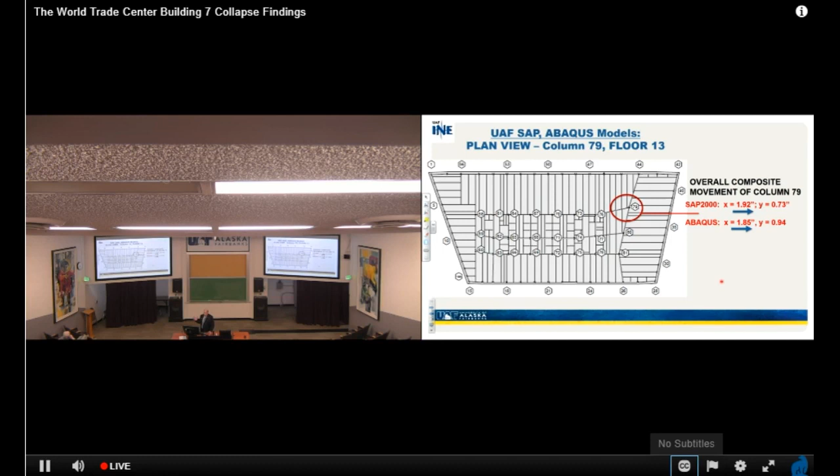And this is on floor 13. Are we all okay? Feeling good about it? All right, good. So approach one, NIST—wait a minute, I'm sorry.

So the other thing I want to share with you is the movement of girder A2001 relative to column 79, floor 13, was as follows. We looked at composite, partially composite, non-composite, and NIST only looked at one thing: that was 5.5 inches to the left, non-compositely. NIST later revised their girder movement to 6.25 inches after being alerted that the bearing seat was 12 inches wide and not 11, as originally stated.

And NIST also only examined the non-composite condition, which wasn't the case on that day. It was truly composite.

Approach two. We took ABAQUS, a very, very sophisticated finite element program, which if it doesn't have the algorithms you need, you can add them to it. It's really quite powerful, really a wonderful program. We used it to simulate, using solid elements, the floor framing for floor 13. That's where all the buzz is about, floor 13.

These elements were used to evaluate the validity of NIST's collapse initiation hypothesis. The NIST assumptions were that the exterior east wall was fixed, and that was not valid—it was flexible. I think I've already told you this more than once.

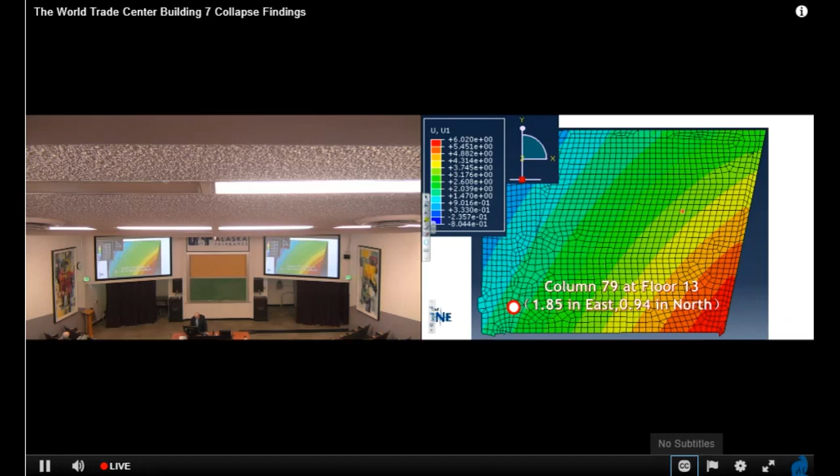Evaluation of the NIST hypotheses is what we're going to talk about next. Here is column 79, column 80, 81, column 44. Here's a group of beams with horizontal stiffeners between them so they wouldn't buckle. And here's the other beams, B3004A, and so forth. The reason that's important is we're going to take a computer model and virtually simulate that, then use the NIST assumptions to see if they were actually correct.

I didn't want to just say, okay, I'm not going to accept it. We needed to be sure whether it could have been correct or not. So taking that, NIST argues that the absence of girder shear studs caused the girder to not have sufficient lateral restraint. Failure of the girder-to-column connections were caused primarily by thermal expansion of large span lengths of the northeast floor beams. This is their argument—these are not my arguments, please understand that. You see the big letters, NIST? Okay, that's not mine.

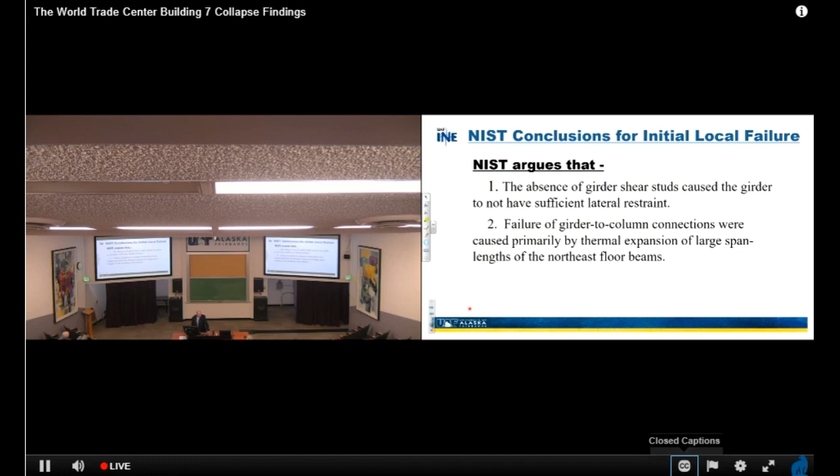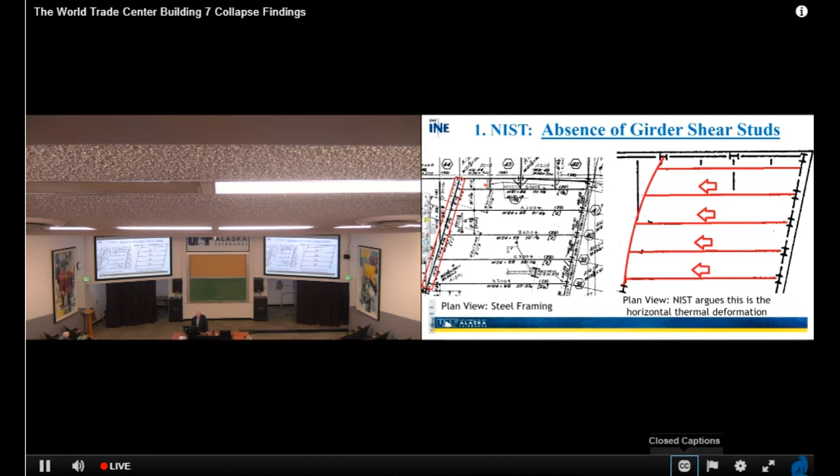Absence of girder shear studs—if they're absent and it's heating up and moving from that exterior wall that they claim was fixed, then it's going to go west, okay? This is plan view, and this is the girder A2001 from the actual drawings. This is just another counter-argument to the girder missing shear studs claim. It was found that court records show there were 30 shear studs equally spaced along that girder. So the solutions based on no shear studs were not valid.

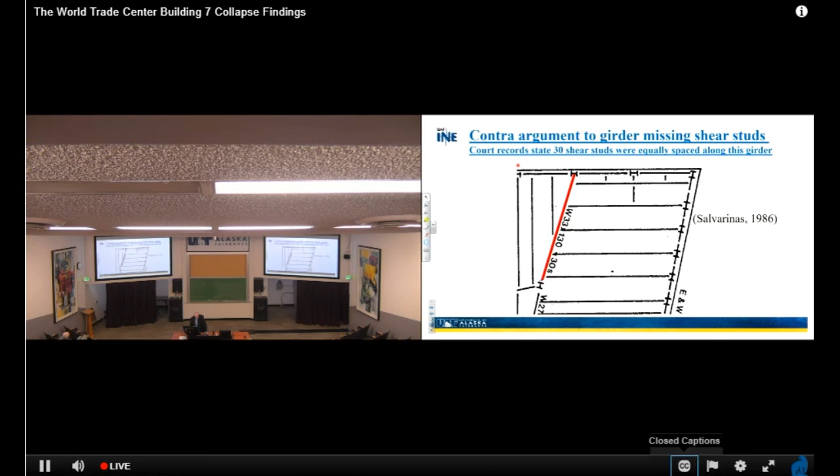NIST's conclusions also stated that fire-induced weakening of critical columns did not cause WTC-7 to collapse, and I don't disagree with that. Temperature in column 79 was below 200 C—that's okay, we got similar results. Horizontal beam movements were caused by thermal expansion, no problem with that. And lateral displacement of girder framing into column 79 was a result of thermal expansion of the beams framing into the girder.

Basically, they said at column 79 they lost lateral support over 9 stories, which then caused a cascade of failures to occur, and then from that you would have ended up with the failure you would have seen in the video.

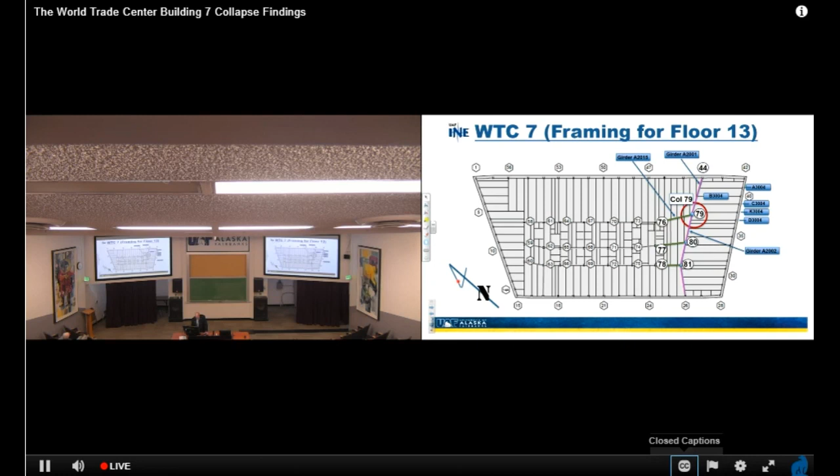Keep in mind, where's column 79? It's not in the middle of the building. It's over there on the northeast corner, pretty much, right? And notice, there's nothing symmetrical about this building. It's a trapezoid. So those things aren't helping anybody.

And it was quite a complex building. The other thing that happened, which we discovered pretty quickly, is NIST modeled the connections within this zone, all around column 79, all that area.

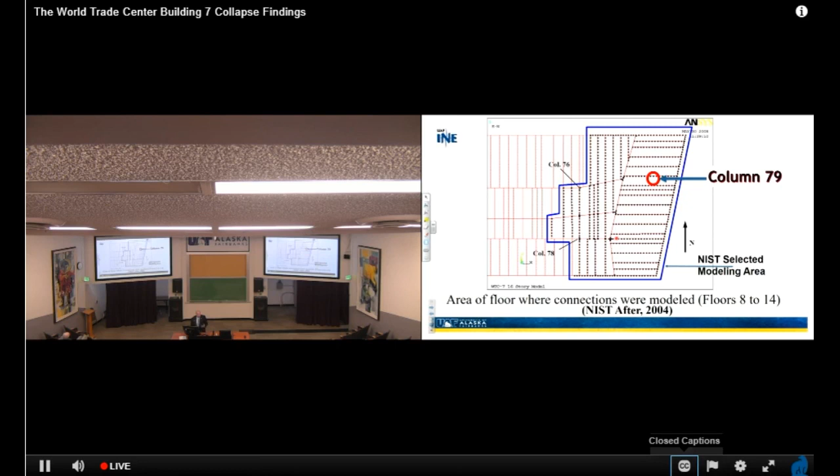But they did not model the connections over here, and they did not model the connections along the exterior. So area of floor where connections were modeled from floors 8 to 14, were in that zone, which really bothered me. Bothered me because it's not representation of what the building had. So outside the selected area, connection failures were not modeled by NIST.

This is just a summary of what I just told you. NIST used fixed or pin connections, which were not modeled by NIST on any exterior walls. And so here we are.

So a girder was considered to have lost support when its web was no longer supported by the bearing seat. The bearing seat at column 79 was 11 inches wide. Thus, when the girder at column 79 had been pushed laterally at least 5.5 inches, it was no longer supported by the bearing seat. Really? Well, they changed that from 5.5 to 6.25 later.

So NIST results were, okay, let's just take a look. We're going to take a look at their model, their simulation based on what I've shared with you so far, and the actual footage. So bear with me. Note, in the NIST model, no connections were modeled along the outside frame. Just remember that. So here is the simulation that they have.

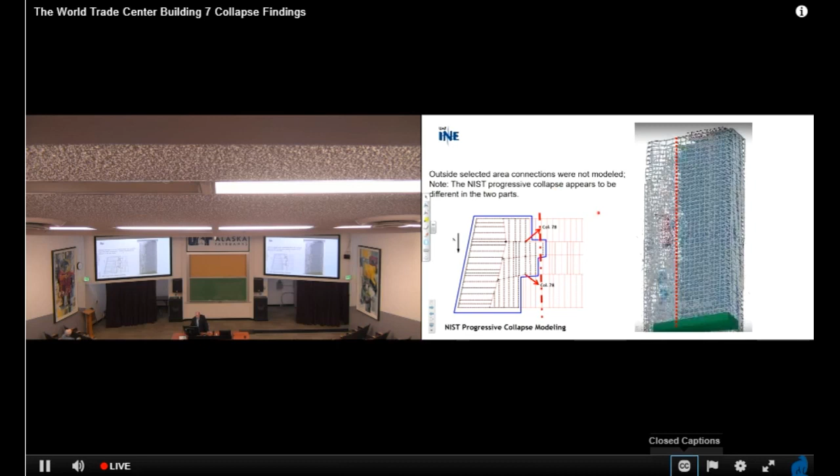That's their modeling. This is again, looking at this side right here, you see that there's an outside selected area that were not modeled, and then this progressive collapse appear to be in 2 different parts. So here you can actually start to see it, what I'm talking about. You're going to see something going on here.

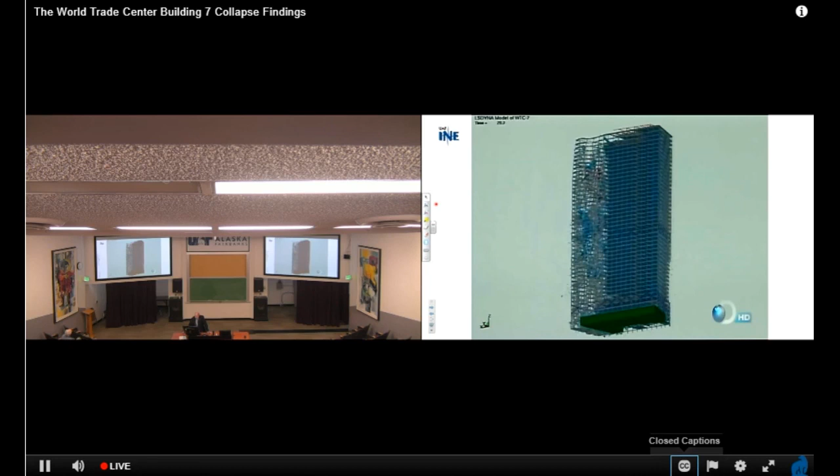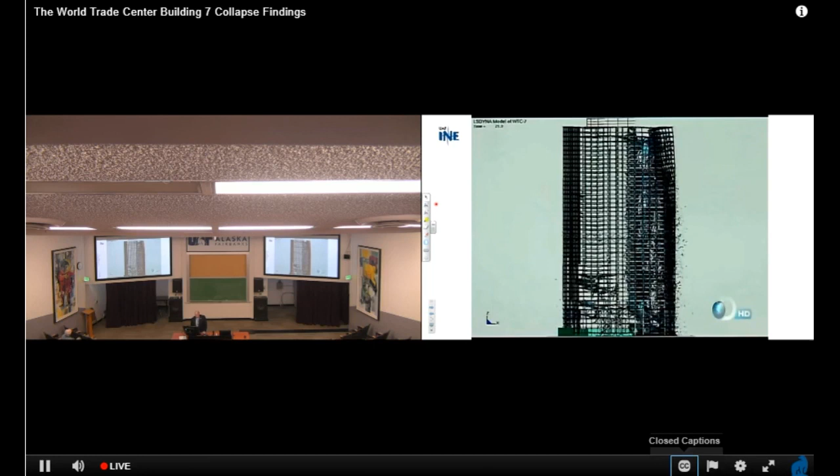So let's see what it looks like, what I'm talking about. Notice you have different stiffnesses just because of the connection issue. Looking at the other side. So this is the NIST simulation.

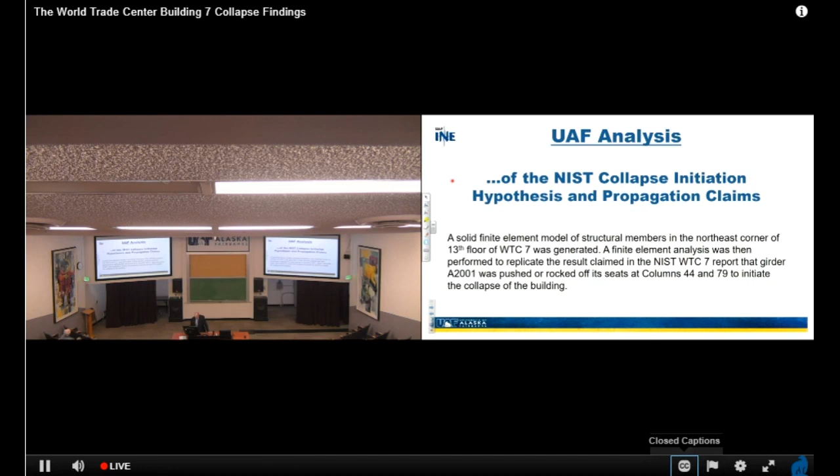So what about us? What about the UAF analysis of the NIST collapse initiation hypothesis and the propagation claims? A solid finite element model of structural members in the northeast corner of the 13th floor of WTC-7 was generated. We used Abaqus to do that, by the way, and we used solid elements. A finite element analysis was then performed to replicate the results claimed in the NIST WTC-7 report that girder A2001 was pushed or rocked off its seats in column 44 and 79 to initiate the collapse of the building.

Here we are with respect to that plan view for floor 13. Okay, we are at floor 13. There's column 79 here. Here's columns 80 and 44. We need to focus right here. Girder A2001 spanning from column 44 to 79. Column 79 is circled because that's where all of the buzz was about.

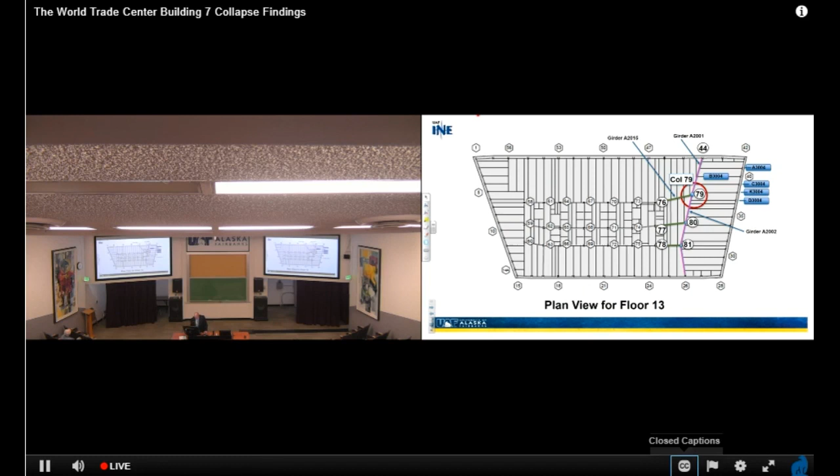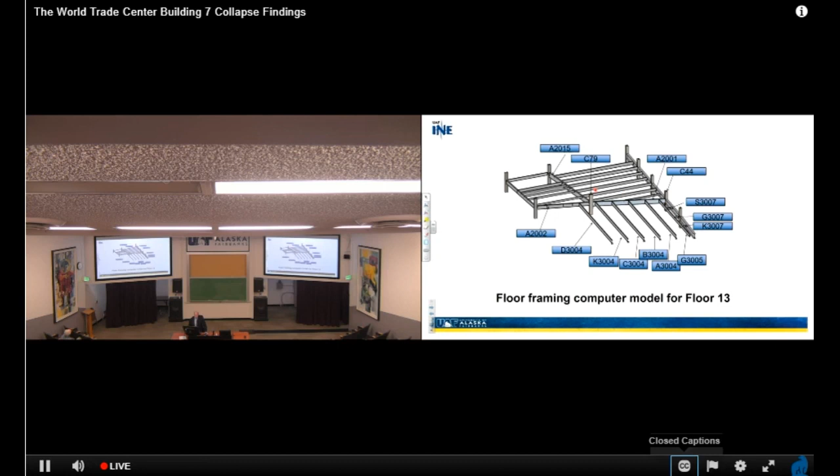This is the virtual model of the floor system from Abaqus, showing you exactly, and you'll see right in here there are frames, because that's another point of controversy. They're claiming those didn't exist. We found that they did. This is the picture of the frame itself out of Abaqus before we perform an analysis on it, before we heat it up. This is the so-called side plates I was telling you about.

Here is a W shape, if you look at it. And then there are side plates that extend beyond the flanges, 2-inch by 26-inch build-up side plates, and that's a W14 by 730 structural shape. So if you imagine that column had a bearing seat, and a beam was up against it, those side plates would stop it from moving off the base plate. And this is what it looked like off the drawings.

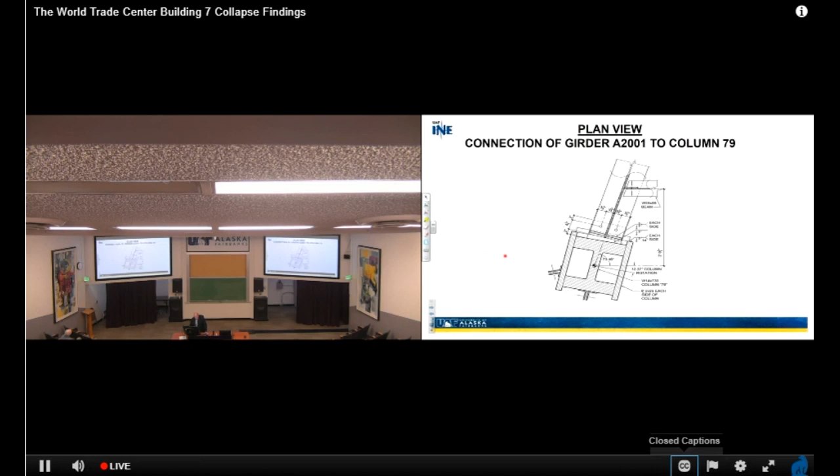So this is a plan view connection to girder at column 79. And this is girder A2001, by the way. And right underneath here is the base plate. This is a view of what happened when we heated it. You can begin to see that this girder tried to shove west using their assumptions, fixed on the exterior wall, all that kind of stuff, and tried to shove, but it couldn't come off of it.

So the Abaqus analysis of floor 13 with the assumed temperature distribution from NIST and original load condition showed the side plate on the flange of column 79 would have prevented A2001 from moving to the west more than 3.5 inches. Locked in, couldn't do it. So thereby preventing A2001 from losing its support at the bearing seat.

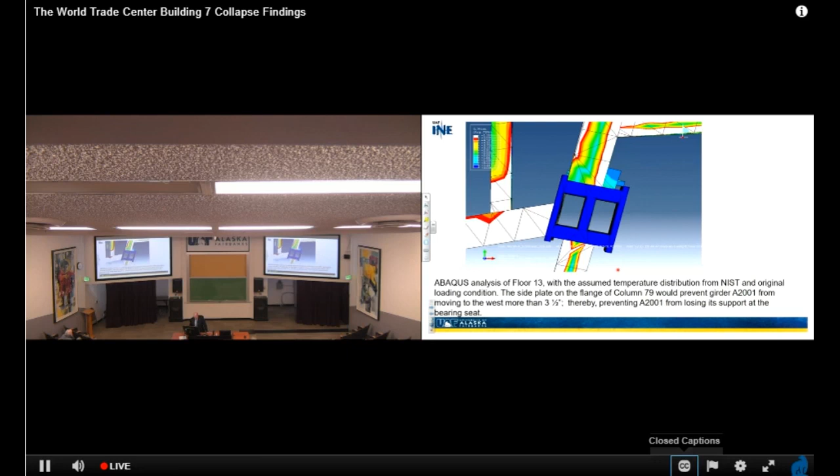Okay, hopefully that's a visual that you can imagine. Looking underneath at the concrete deck on top of the beams, this is column 79. This is the girder, column 44, which is on the top part, the north side of that building, exterior wall.

Now we're looking at on top of that, so this is without the concrete beams. This is column 79, 44. There's W33 by 130, A2001, and there's your exterior columns.

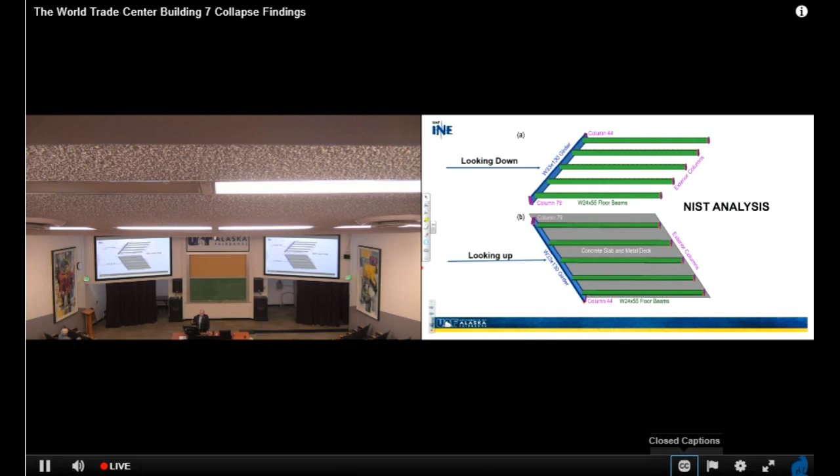This is a NIST analysis. We ended up with the exterior columns having the buckling conditions, W24 by 55 floor beams. This is W33 by 130. So these are the exterior columns, and these are the floor beams that actually were buckling between them.

Another view of that. Here's what I'm talking about earlier. I said this beam buckled, that beam buckled. This is a plan view, this is column 79 right here, this is the exterior wall, this is due to heat.

And over here, I've called your attention to this more than once: they did not include the bracing that was actually built into that building. So this diagram demonstrates that two beams close to column 79, D3004 and K3004, had buckles in the analysis, and beam G3005 buckles in the analysis as well. So there's three of them.

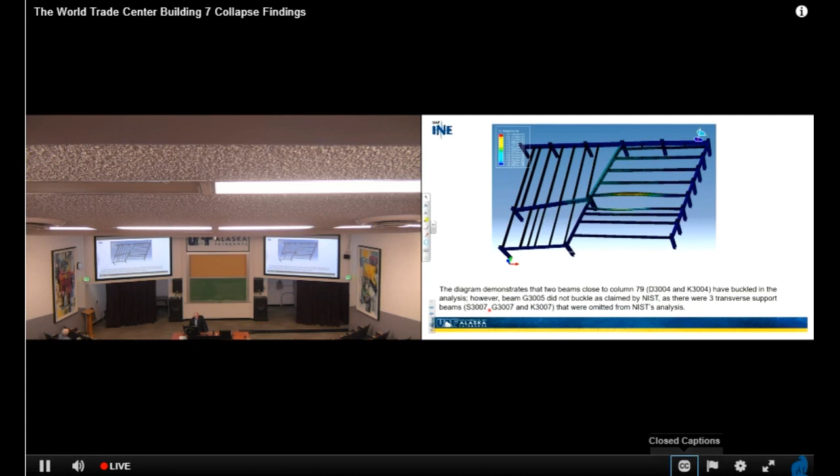The diagram here demonstrates that with those braces in there, it doesn't buckle. So now you only have these two that would be buckling. The diagram demonstrates that the two beams closest to column 79 have buckled in the analysis. However, beam G3005 up here did not buckle as claimed by NIST, as there were three transverse beams, S3007, etc., that were omitted from their analysis.

So I've just shown you that, okay? So more evaluation of the NIST analysis.

The next five slides that I'm going to share with you show that the simulation of floor 13, even if the side plates were not part of column 79, girder A2001 would still not be able to travel far enough to lose its seat support. The reason is simple: it had partial height bearing stiffeners which stiffened the flanges of the girder, thus preventing it from failing. But NIST did not include them, and yet they were there.

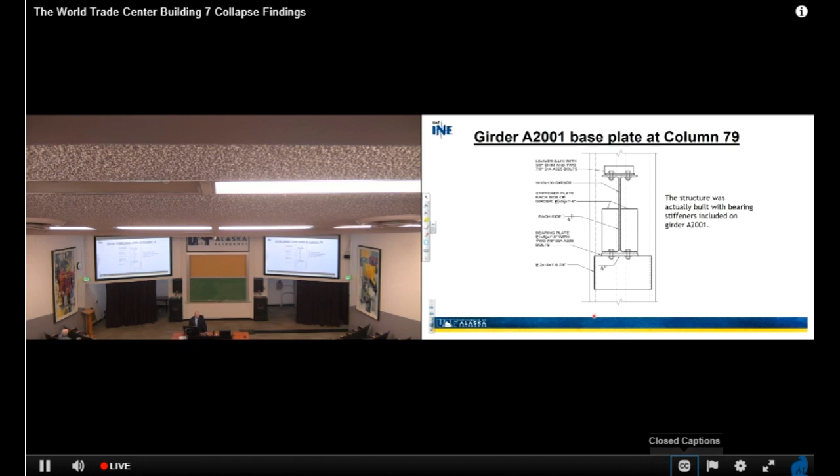So here are the bearing stiffeners I'm talking about. This is girder A2001. Here's the base plate, and here are the bearing stiffeners. They were there. And here's our model showing them.

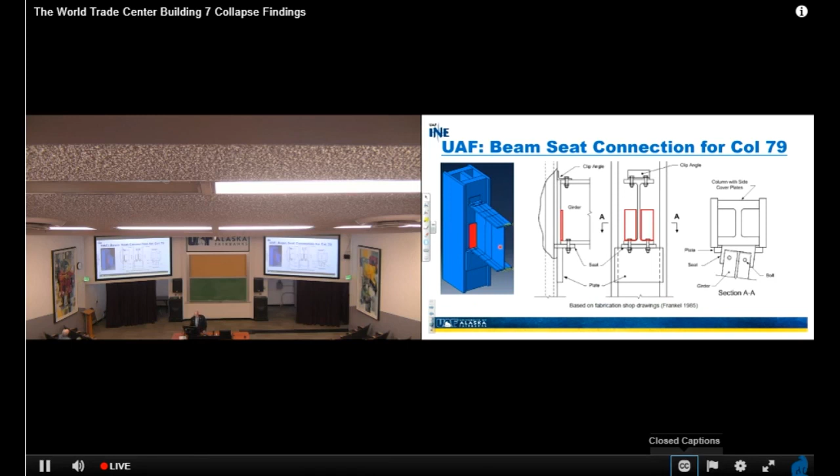This is the Abaqus model. This is with the side plates, all that kind of stuff is there. You see, that's our simulation, a virtual simulation of the same thing that was built. That's what we did. We broke them out.

This is another depiction of the NIST report showing that the bearing stiffeners were omitted. You don't see them. Another depiction from the NIST report showing the bearing stiffeners were omitted from the girder.

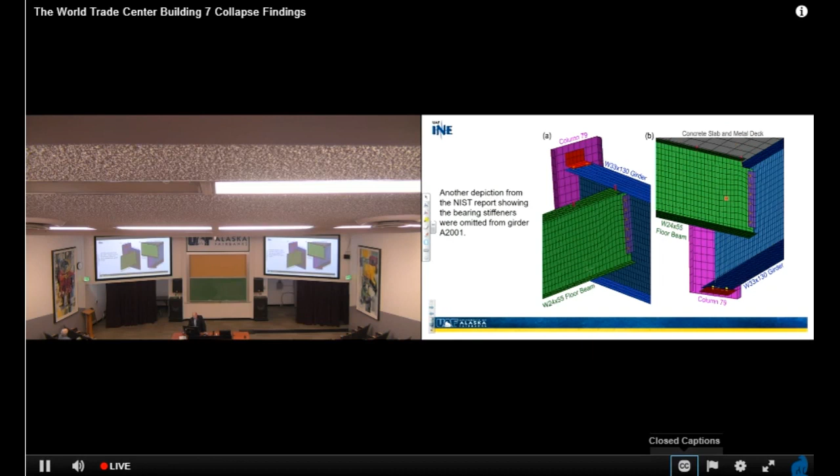So here's the W33 by 130 girder, column 79. Here's the W24 by 55 floor beam. And so this is A2001. Concrete slab, metal deck up here. This is the arrangement, again, another view.

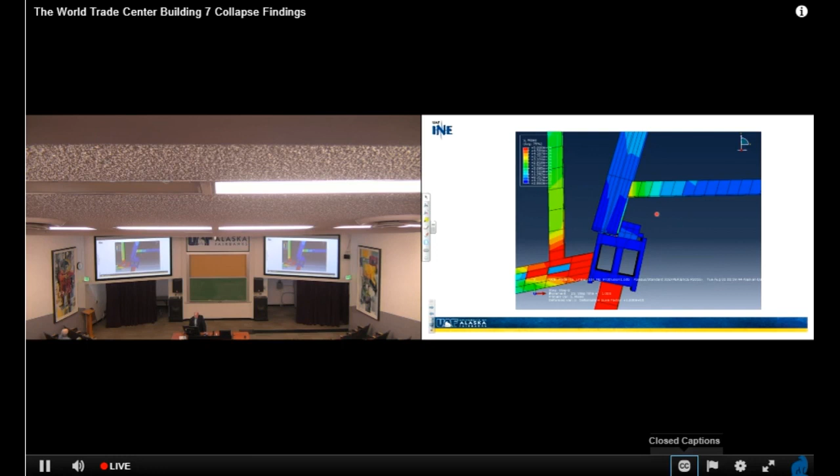This time, no side plates. Using the NIST model, you can see it still didn't drop off the base plate. It hadn't moved enough to make that happen. Yep, it was getting way too close, for sure. Another view of it, okay.

Issues that led to the 5.5 inches of movement: non-composite main girders, neglected thermal expansion of the concrete slab, separated connection modeling, and missed web flange stiffeners.

I want to point out, I haven't talked about this yet, but if you take steel, it has a thermal expansion of about 6.5 times 10 to the minus 6 inches per inch per degree Fahrenheit. If you take concrete, it's made up of rocks, water, cement, and the aggregate, and the amount of aggregate is going to significantly affect that thermal expansion.

Limestone, for example, has very different thermal properties than sandstone, than dolomite, than other rocks. Each one of those has thermal expansions that can range from 2 times 10 to the minus 6 all the way to 12.5 times 10 to the minus 6, depending on what you're putting together with that steel. In this case, I tried to do our best to locate what the aggregate was that they were making concrete with in that area and put that into our model to simulate what was going on.

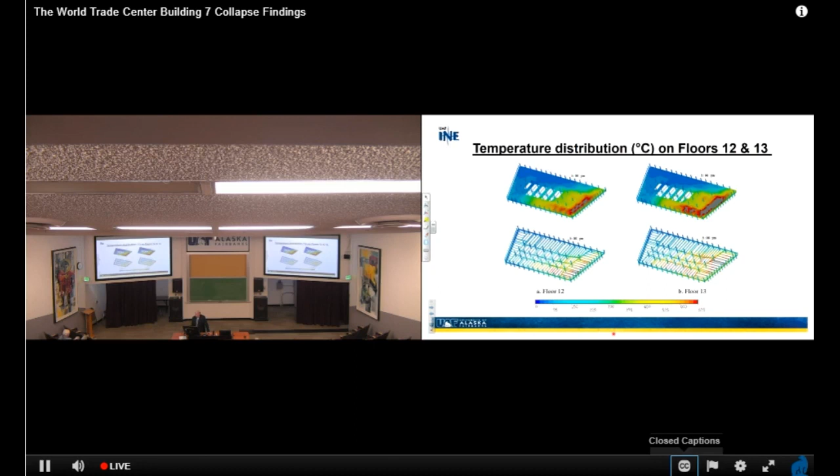Now, what about the NIST fires? This is the distribution of the heated up floor systems at different times at floor 13, by the NIST temperature distribution. We did some modeling of the temperature within the floors and came up very similar, so no arguments there, and we used these temperature distributions as part of the analysis.

The UAF WTC7 Abaqus modeling, this is kind of what it looked like. You can begin to see that this is for floor 12 and 13, not for all 47 stories. You can imagine what it would have meant to do that.

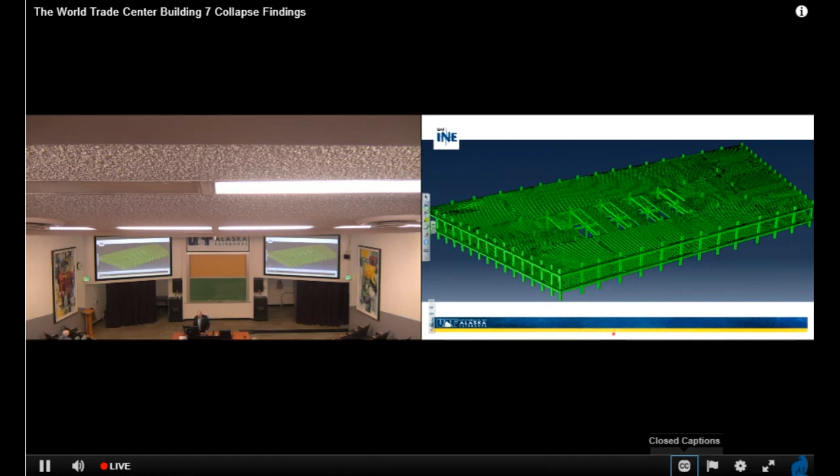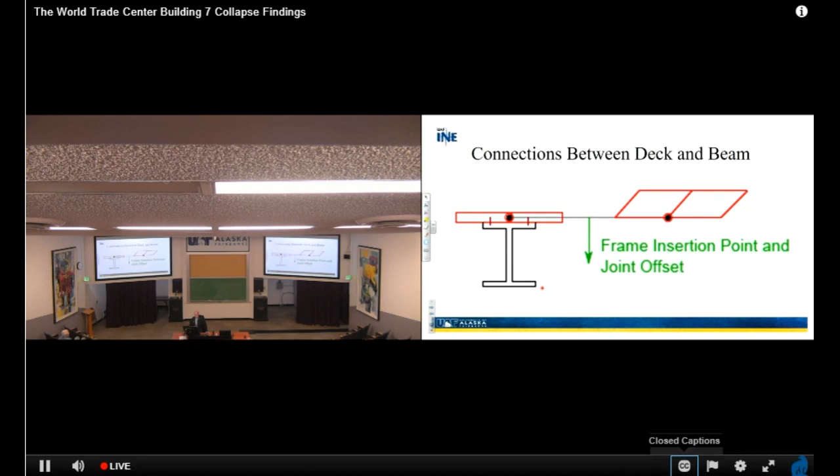We took a look at the connections between the deck and the beam, and I haven't put very much in this slideshow about that. But basically what we did is we looked at a frame insertion point, joint offset, and we accounted for the interaction between these two when they were acting compositely.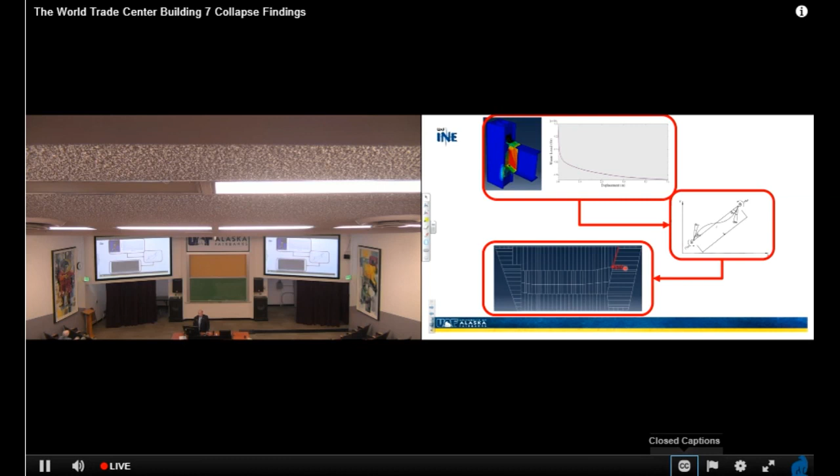We then looked at sample connection response. Here's a sample connection, I'm not going to show you all of them, just a snapshot of what we did. Here is the model, here is its performance, steel loading versus displacement. We ended up with a behavior that looked like that, and here's where it was located in the building.

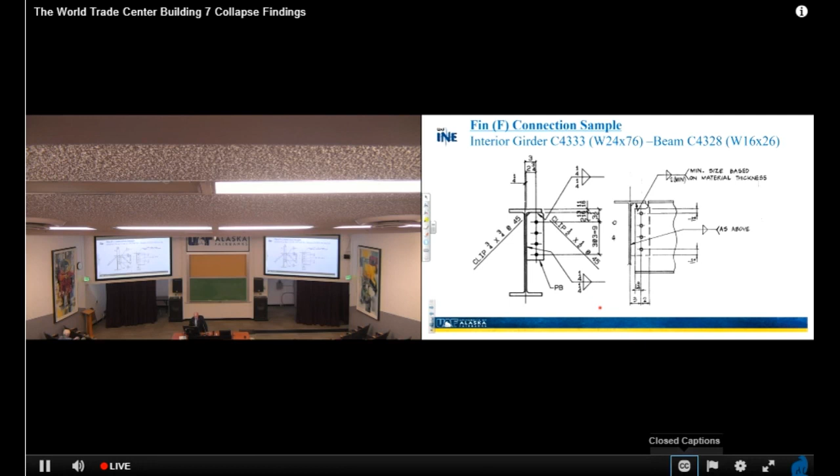Then we took another one. This was what they call the fin connection sample, where we had an interior girder going into a beam, W16 by 26, and we modeled it, that's called F, and that's where it was located. So we took each one of these, put them together, and put it into the structure.

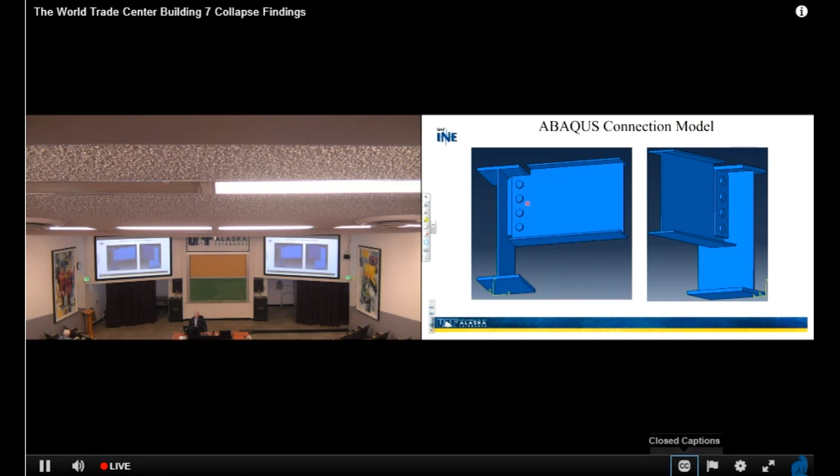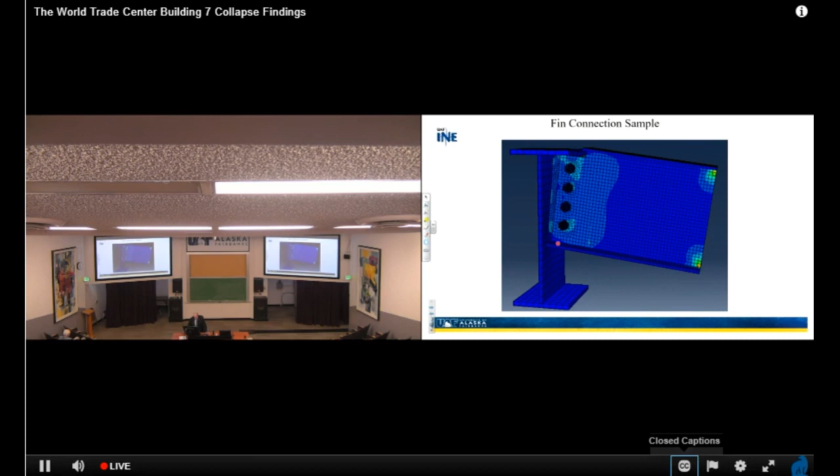This is the ABAQUS connection model I'm just talking about. You can see it's a shear connection, just bolts. The flanges are not fastened to anything to resist moment there. Here's an example of it behaving. Oh my gosh, it's actually moving, you see, and it has the bolts there, the shear bolts, and that's pretty much how it's going to look.

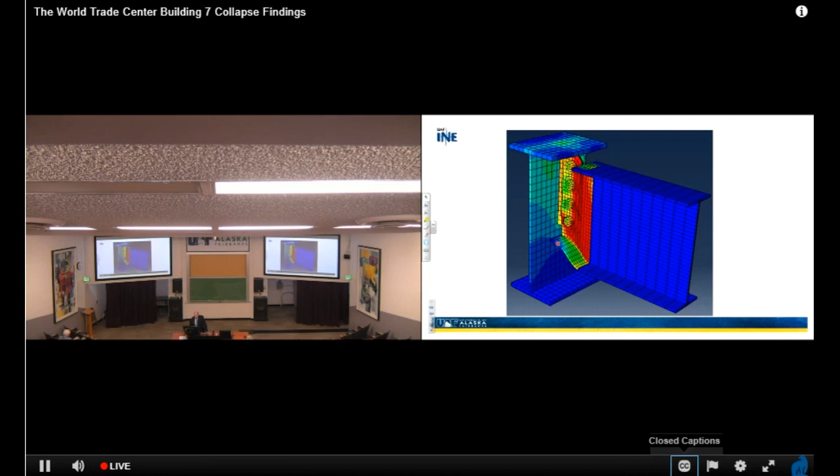And this is a moment rotation curve for that. Despite the fact I said there's no moment, the bolts are still resisting some twist, some rotation. Here's another look at what it's going to look like if it's really starting to get stressed - shear displacement.

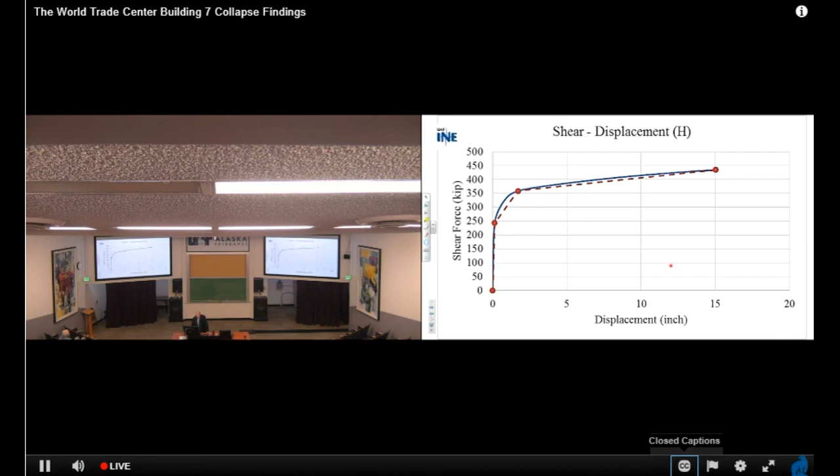I guess I had enough to talk about for four years, and I didn't want to hold you that long. So we have basically computer models to look at what's going on. Oh, I'm sorry, I'm going in the wrong direction, I apologize.

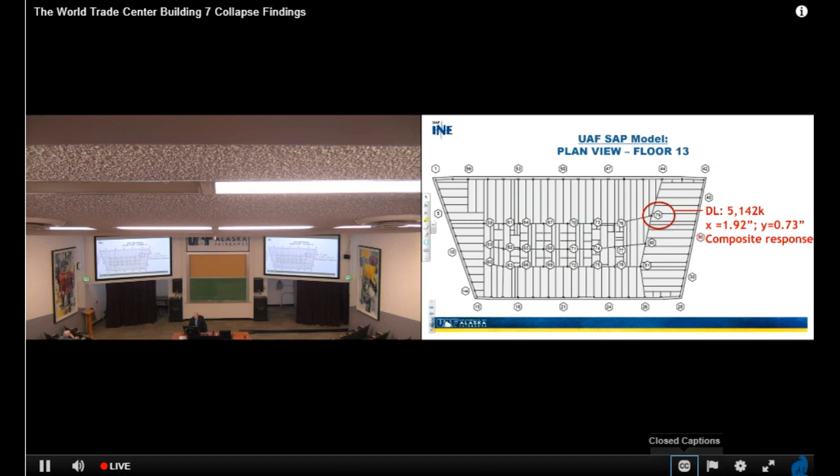Remember that we saw a fairly significant amount of load that column 79 could take in if we'd had 200 degrees C. 5,142 kips was what actually was acting on that structure that day. It moved 1.92 inches to the right and 0.73 inches upward. This is a composite response.

What do our UAF conclusions say? The concrete floor beam diaphragm stiffness is significant even with no shear connectors, because there's friction between the concrete and the steel framing, and it's not trivial. The thermal expansion of the concrete deck cannot be ignored, and it's likely less than steel; the value is highly dependent on the type of aggregate.

I've intentionally taken you down redundancies all night long because I wanted you to remember what I was getting ready to say. The research team evaluated fire by considering the airspace below the beams and the space between the drop ceiling and the structural steel framing. I initially did not intend to do that, but our dean said maybe you should think about that, so I did. So we did look at that issue.

The result is that the fire underneath will likely burn through the drop ceiling quickly, and its resistance to heat transfer is likely not available to help anything. The NIST vertical collapse was not consistent with that of the actual observed collapse. The difference was primarily influenced by their not modeling a significant portion of the structural framing connection details - at least that was certainly some of it.

So what about the actual collapse? We evaluate possible failure modes using SAP 2000. We conducted failure mechanism studies using both ABAQUS and SAP 2000 to ensure reliability and accuracy.

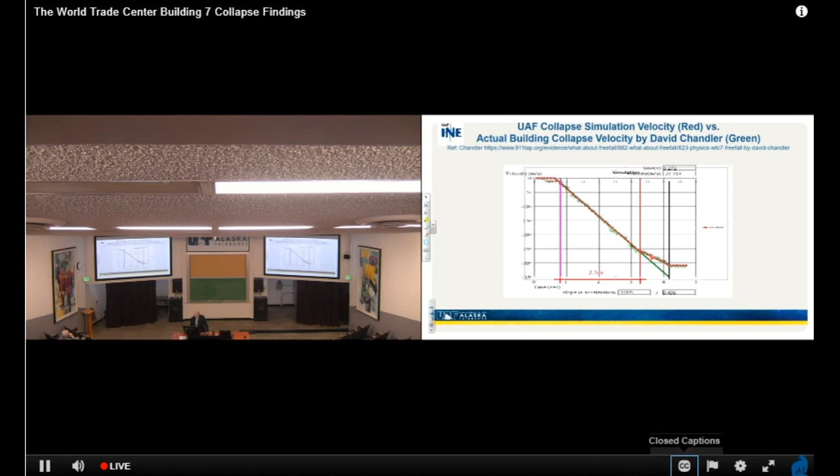UAF methods for assessing building collapse. Here's the UAF collapse simulation velocity in red, and actual building collapse velocity by David Chandler, who took the video and monitored aspects of it over time and plotted it. He was a physicist, and over a 2.5 second period, you can see it's free fall. That's what that building did. Our red simulation points are very much on top of that, just to give you an idea.

So what about the collapse? We evaluated numerous progressive collapse hypotheses, but we found it did not experience a progressive collapse, and yet we also determined that it was going to be a global collapse.

So the first global collapse simulation in perspective 1 is about what we're ready to look at. The simulation was done to compare with the collapse footage, and the collapse we're looking at right now is basically all the interior core columns taken out at floor 13. We need 8 stories below that to provide space for the building to fall without being resisted. So at floor 13, we took those out. 1.3 seconds later, we took out all the exterior columns at that floor. That's what you're about to see. This is the still of that—this is what's going on.

What you see on the left is our simulation. What you see on the right is the actual building.

First global collapse simulation in perspective 2. We're going to look at it from a slightly different direction. The simulation was done to compare with the collapse footage, and this again was set at floor 13. So here it is.

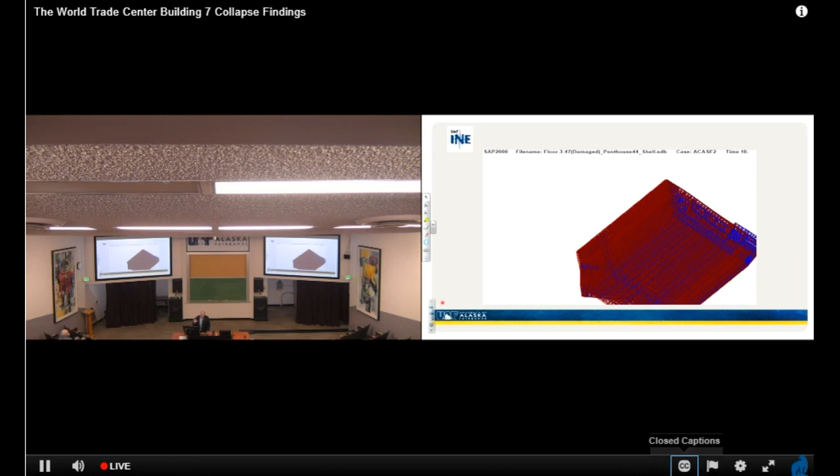Here's where we started, with the whole three-dimensional building, and here's what started to happen as we took columns out. It wasn't the collapse we see, it wasn't the collapse that they showed on their computer.

If you take the story and put it into the computer models, this is what you end up seeing: tilting. I was pretty confident I was going to see this on the first day I started this and looked at that centroid issue, because I'd done enough high-rise buildings to know that they're not wanting to fail straight down unless they are uniformly distributed.

So the analysis was based on this assumption of column 79 buckling at floor 13.

The static analysis started by failing columns 79, 80, and 81. Even though the analyzed axial forces didn't exceed their design load capacity, you're going to see green circles meaning it didn't exceed capacity, and red circles meaning the columns exceeded their design load capacity.

There are three columns there - did they exceed capacity or not? We don't see anything happening yet, nothing failed when columns 79, 80, and 81 were removed. But columns 76, 77, and 78 were removed to initiate progressive collapse. We took them out anyway.

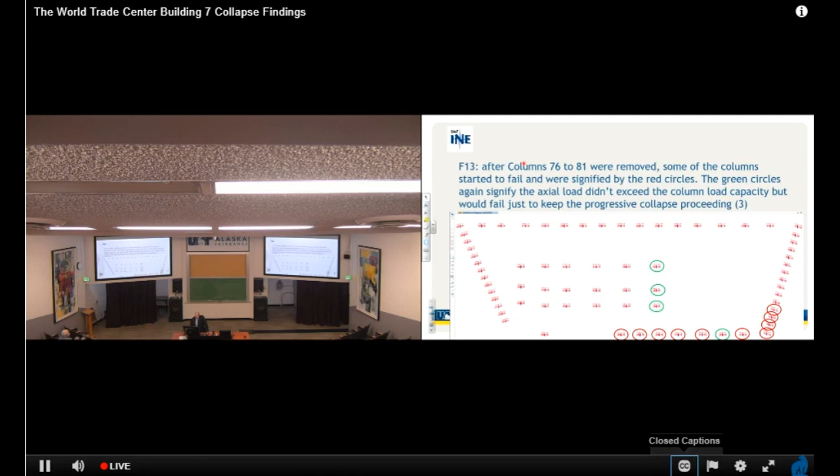Here's a look at the floor system from a side view, and then you begin to take these out as you move forward. Some of the columns started to fail, signified by the red, and the green circles again signified the axial load that didn't exceed the column load capacity.

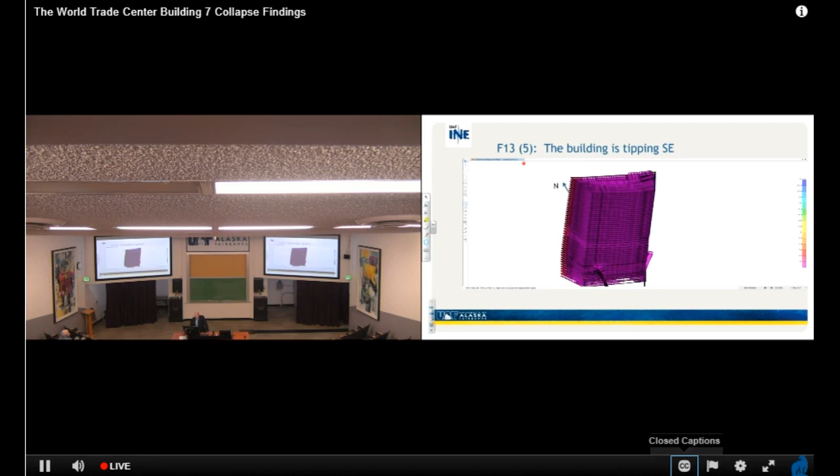Okay, so that's my story. Here's the summary and conclusion, and then I'll let you go home and eat. WTC-7 did not fail due to fire.

WTC-7 did not experience a progressive collapse. WTC-7 came down as a global failure in free fall. The penthouse failed when column 79 lost its support near floor 45, above the fire, and this failure occurred approximately 5.5 seconds before all the inner core columns failed lower down in the building. After the interior core columns failed, 1.3 seconds later, all the exterior columns at that same floor level failed.

We do know that more than one possibility could have occurred to give you almost identically the same result. We know from floor 13 to 19 for sure we could simulate that very easily. While the failure could have occurred over 8 floors at various heights of the building, video footage showing floors 17 to 47 moving forward or downward as a unit suggests the failure occurred at or below the 6th to 16th floor. That's just to put it together.